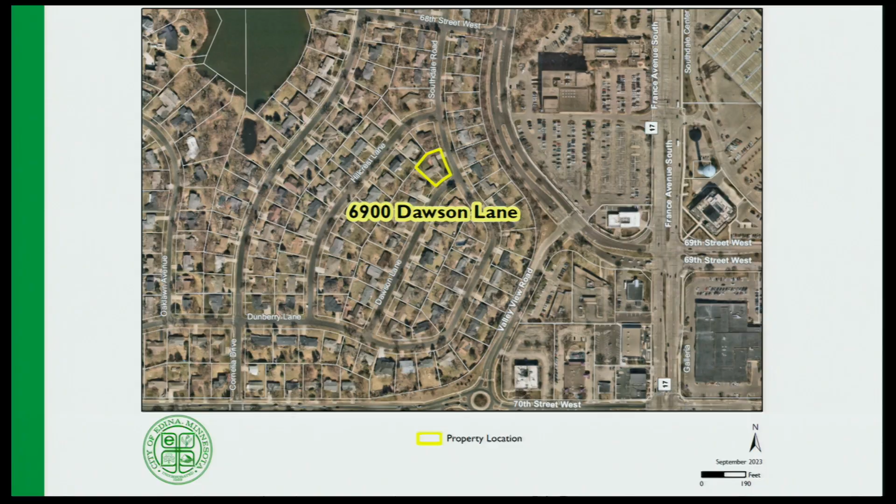And with that, Planner Teague, take it away. Thank you, Chair, members of the Commission. I'm filling in for Addison this evening, the author of the report. This is a variance request for a single-family home located on Dawson Lane. It's located west of the Southdale District, at the intersection of Dawson Lane and Southdale Road.

What the applicant is proposing to do is, currently they have a 2-stall garage with their home, and they'd like to get a 3rd stall garage. So it would be removal and build of a new 3-car garage located right here.

The way Edina's ordinances are set up, for a corner lot, when a house is built, it's up to the property owner to determine what their front yard setback is. When this house was built, it was determined that Dawson Lane would be the front yard setback and Southdale Road would be the side street setback. With the side street setback, you can go up to within 15 feet of the lot line, and with the front on Dawson, the front yard setback would be 35 feet. So that was how the home was located.

So the rear yard setback opposite of the front became this area here, and a 25-foot setback is required. Had they selected Southdale Road as the front yard setback, the rear would have been this side lot line, where a 25-foot setback would be required, and this would be the side. That determination was made back in the 50s when the home was built.

A couple of renderings of what the garage will look like from the street and the back. Looking at the variance criteria, the 3 criteria: first, the variance would be in harmony with the general purpose and intent of the ordinance. The intent is to prevent overcrowding of buildings, provide adequate space separation between buildings, and have a general consistency of setbacks within single-family homes.

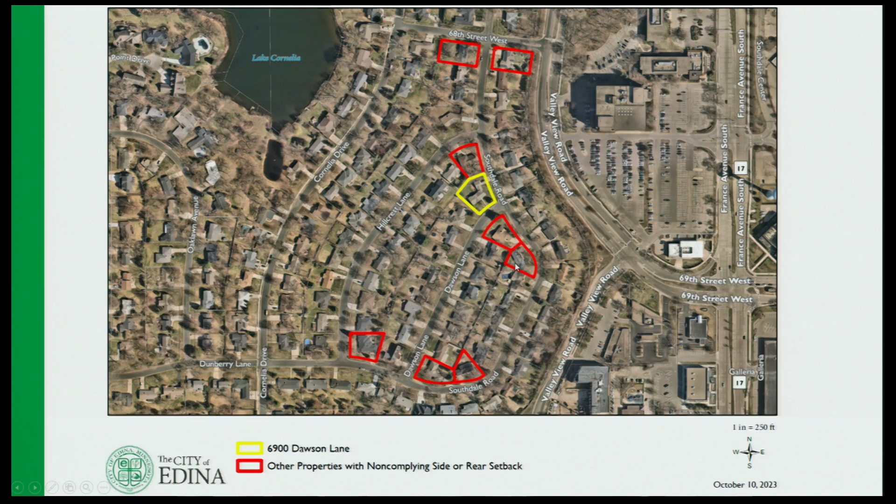The site is unique in that it's a corner lot. We have many corner lots in this area, and a lot of them are non-conforming. The properties highlighted in red don't meet those setbacks, so they're existing non-conforming uses. In fact, the site we're looking at has a 22-foot setback when 25 feet was the requirement, so this house is actually non-conforming as well.

We don't believe it would impact the essential character of the neighborhood. It gives the appearance of a side yard setback off of Southdale Road, and there is adequate separation between buildings. The applicant did provide a lot of support from their neighbors; those letters were included in your packet, and we didn't receive any comments on Better Together. So with that, staff is recommending approval, subject to the findings and conditions outlined in the staff report.

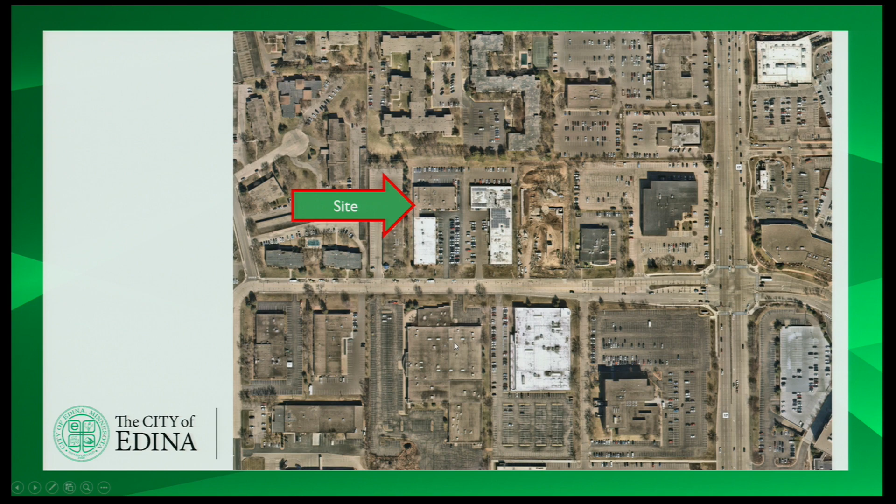Thank you, Chair, members of the Commission. This property is located in the Greater Southdale District, on 76th west of France. It's two properties we're looking at. To the east is a project called The Sound, an all-affordable housing project. Across the street is the future site of a new fire station that we went through recently. The site is guided office residential in our comprehensive plan.

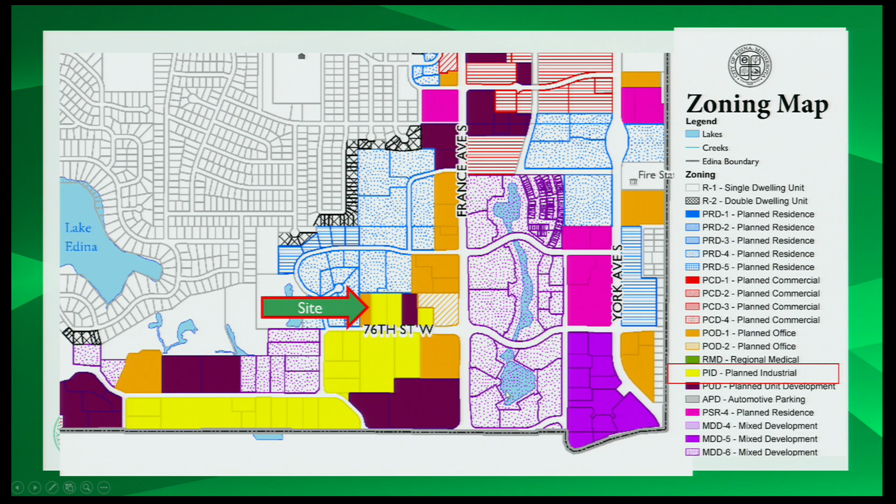Here is a rendering, just a block diagram. You can see the Sound project to the east, and you can see the 4-story and 6-story building.

So what this would require would be a rezoning to PUD. We could extend that existing PUD to the east to cover this site as well. This PUD has been the tool we've used for 100% affordable housing developments, examples being the Sound right next door, the Amundsen Apartments in the 70th and Cahill area, and the 4040 project.

On 70th Street. So just to quickly show you a compliance table, you can see the requirements in the PUD to the east. Differences being with the proposal here: the setbacks are a little bit closer on the north lot line, from 80 feet to 40 feet. The side setbacks would differ.

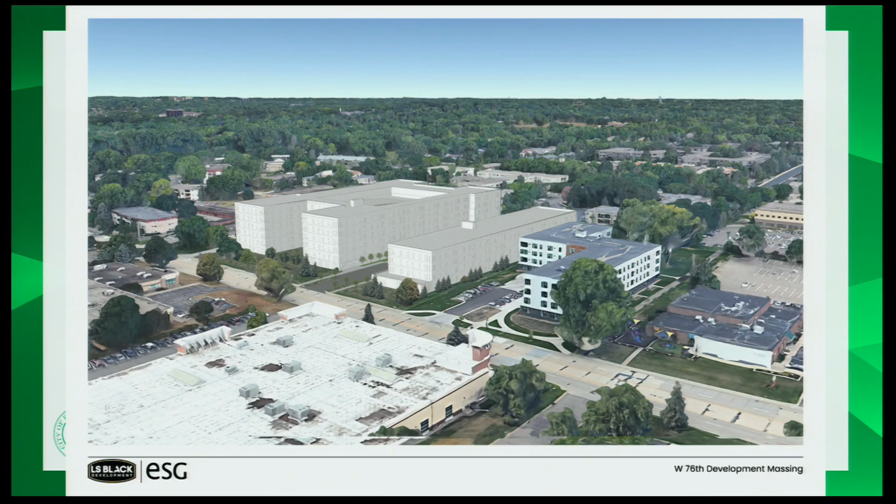Pedestrian connections. Given the large width of the drive aisles that were asked by the fire department, possibly these could be reduced in size, maybe some different textures, geogrid, something to that effect. Mic Johnson did provide a memo for your review. He suggested maybe even some of that space could be active playground, basketball court, something to that effect. So it could be used not just as a fire lane, but could be an active space for the residents of the building.

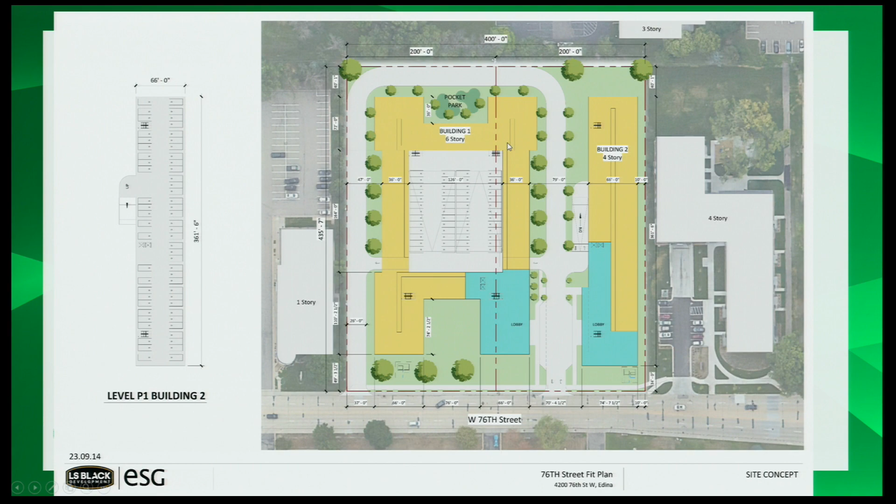They would be required to fill out our sustainability questionnaire. And we talked about the driveway widths being reduced. So I will stop there. Those are some of the issues to discuss. The applicant is here for a presentation as well.

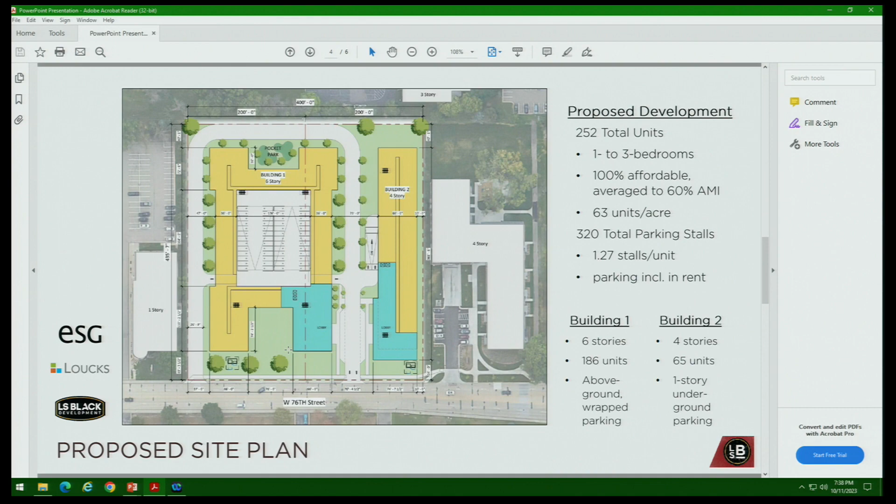We also have this smaller 4-story building here. The reason we separated that - originally what we had shown staff was a larger building, but we couldn't accommodate the drive around the building for fire, and thought that fire would also want 2 entrances or exits here. It seems that one of the recommendations was potentially eliminating one of those, which we could be open to, and we're looking for feedback on that.

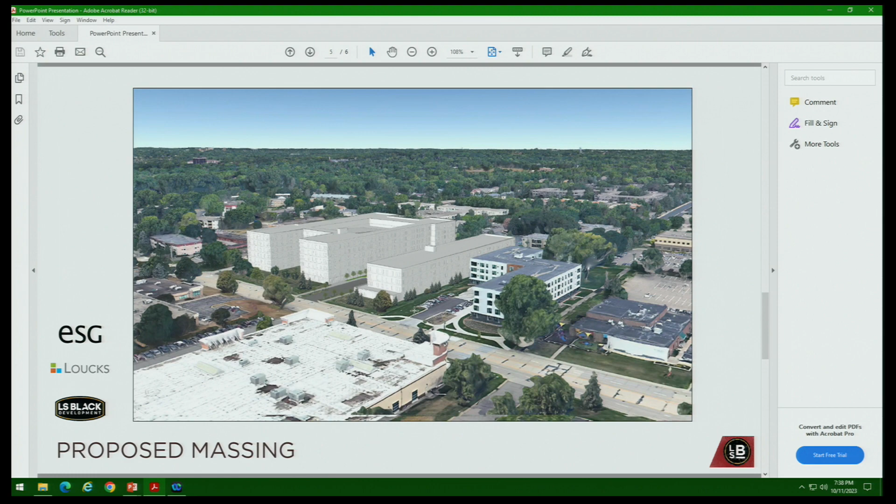Again, this is our proposed massing. They look a little plain at this stage - obviously we aren't showing our balconies here or the Class A materials that we'll have. As you can note in our other projects, we've done a lot of brick and stone and would want to do the same thing in this project.

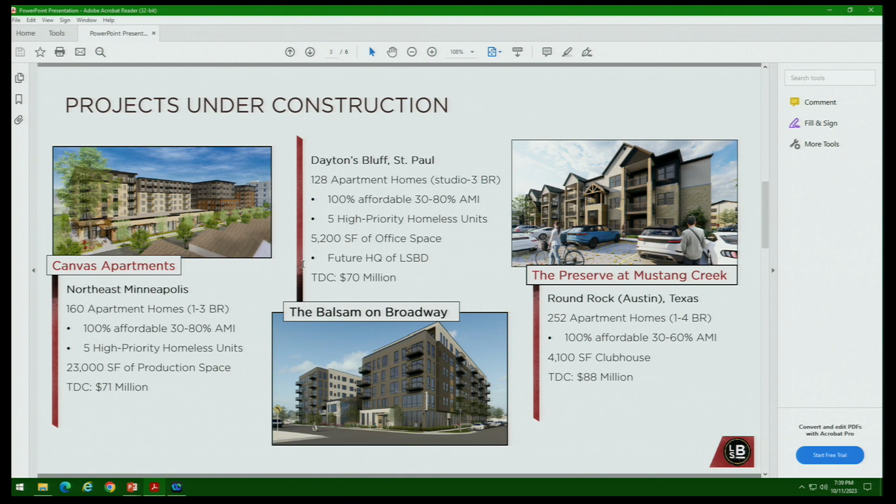One of our goals is for folks on the street to not be able to tell if it's a market rate project or an affordable project. That's very important to us. We're long-term owners - we'll own for 15 plus years, so high quality materials are very important. We do stainless steel appliances, granite countertops, and all the amenities that you would typically see in a market rate property.

Again, thank you for your time, and I'm here for questions and would really appreciate your feedback. Thank you very much, great presentation.

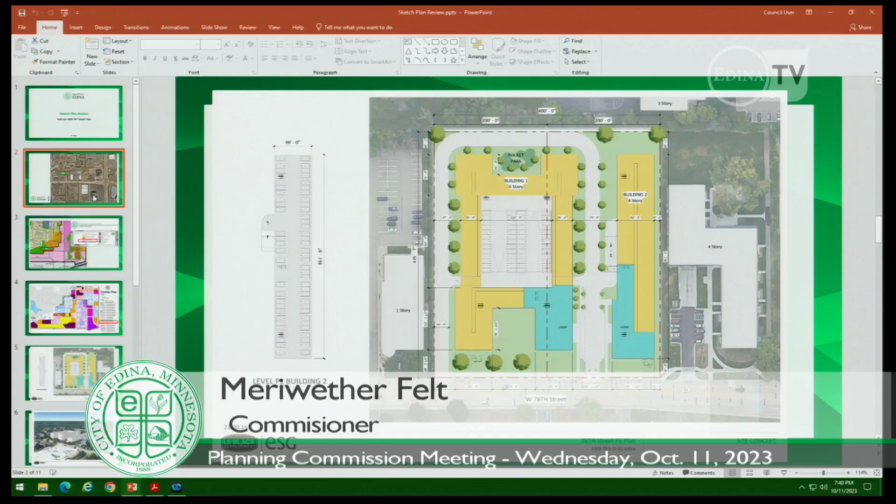So I noticed when you come off France, there's a couple of buildings there, and the Sound is one of them, where the setback of the existing buildings - the Sound, the credit union - are all pretty consistent. And wanted to ask, because your building kind of moves a little closer to the street than that, so wanted to know a little bit about that and if that could be looked at. Sure, I think the larger building is consistent with the credit union, kind of lined up with it here. But yes, this 4-story building does come out a little bit further, so that is something we could look at. In this project, we've just been really focused on maximizing density in order to make the numbers work.

As I'm sure you guys have seen or heard, housing projects in general are hard to make pencil right now, and affordable housing specifically with our capped rents, very difficult, especially in a great market like Edina, where land prices are high. Unfortunately, sellers don't give us a discount for our mission-based cause here. So that's one of our constraints, but that's certainly something we can look at.

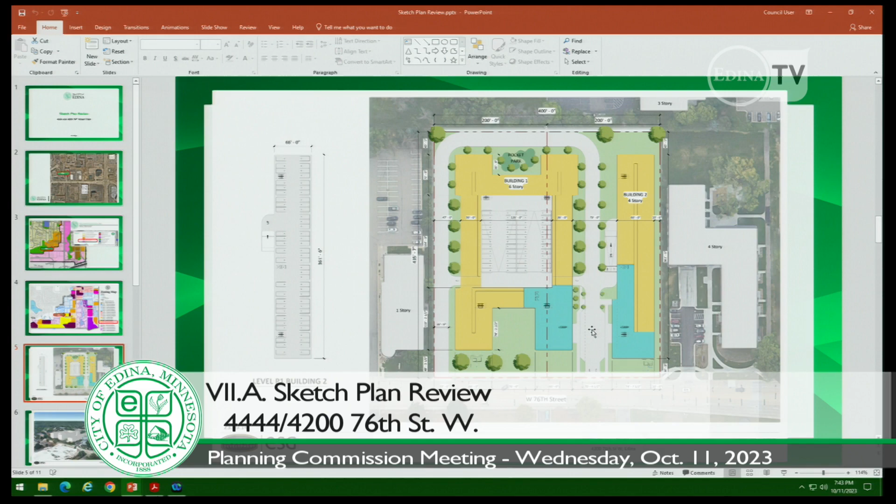Yes, absolutely. So the pocket park and the space in the front - our landscape design is not very far along at this point, so we would have to move that design forward. Another thing I should note, all of our projects built so far have an indoor play area as well as one of our amenities.

We'll have the majority of the units as 2 and 3 bedroom, so family oriented. It's kind of like a McDonald's Playhouse kind of structure, for our cold Minnesota winters. So there'll be multiple options, but certainly we will emphasize outdoor green space to the extent that we can. It would be lovely if it kind of blended in with some of those condominiums and apartment complexes - obviously they have mature trees, those are some of those things that take time.

Another question is this parking ramp - are these level parking? Yes, it's like a podium. And is that all 6 stories? Yes.

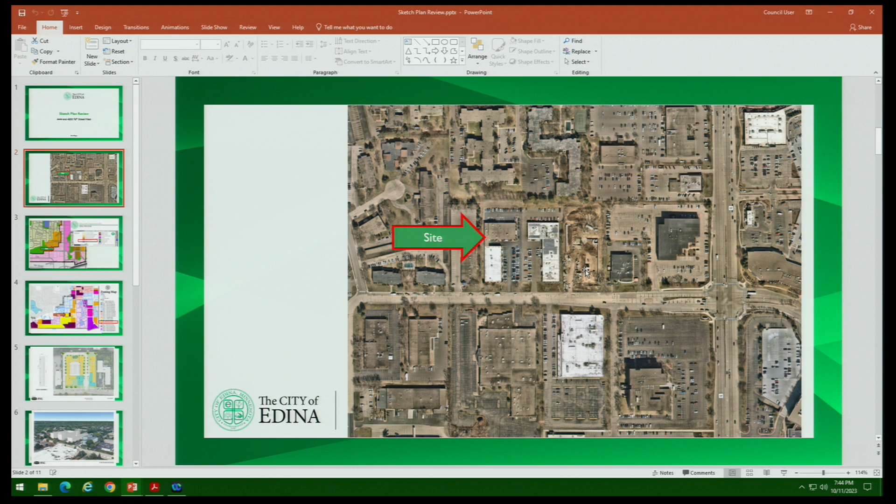If you go back to that site plan, number 2 - if you look closely, I was looking on Google Maps today, it looks like there's a walk on the north side of whatever's in the medical building in the corner that comes around and comes actually by the pond. All I have is a little piece of paper from Google Maps, and you can see a little sidewalk behind there that comes around. It'd be lovely if that could kind of go through, because once again there's some green space with those apartments on the north side.

Yes, and definitely in our site plan it's not fully developed how we will have sidewalks around the whole building as well, and on the front here. But yes, we could look at that as well. I think that's it for me.

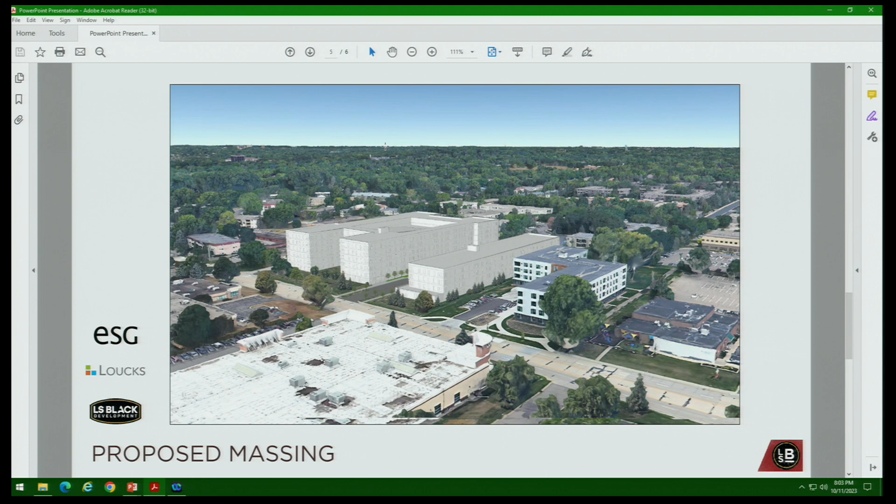Certainly landscaping, and then being creative with the materials we're using. Obviously we wouldn't do a long stretch of one material - that really accents the length. ESG has been great to work with, and I know they've done a lot of work in the city of Edina, so we'd look to them to guide us on the best way to break that up architecturally from a material standpoint, certainly.

Okay, that's all I got for questions. Yeah, Commissioner Padilla.

Just one other question. Are you operating under the assumption that being across the street from a large firehouse will add appeal for renters, or is that a detriment? I don't think it's a detriment. There could be some appeal there. It'll be great to see that redeveloped, and obviously the city has great plans for it. So we're looking forward to seeing that happen. But I don't think it's a detriment. Okay, but you're aware of it.

Correct. But it has nothing to do with your economic model in terms of how you derive rents or anything like that. No.

Any other question? Yeah, Commissioner Miranda. Yeah, thank you. So you mentioned that your building in St. Paul, you have some office space or will have office space for your business there. Is there any thought to having office or retail or restaurant in this building or either of these buildings?

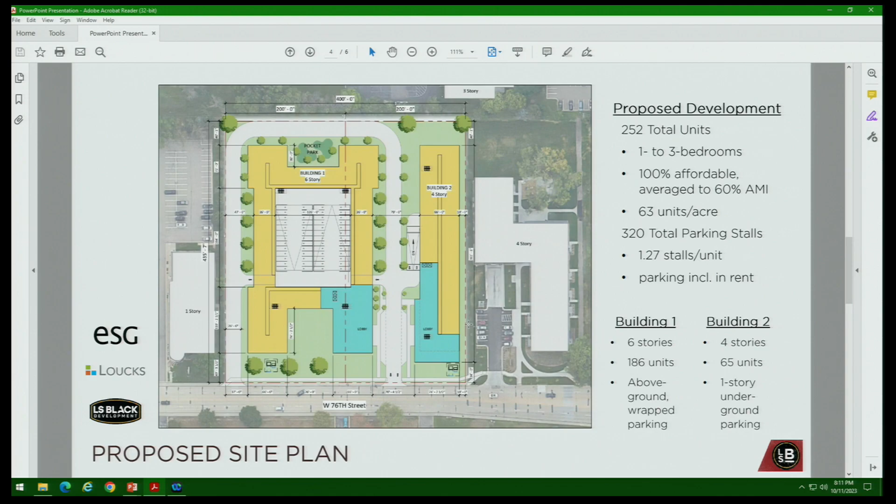If you've got a lot of people living here on a denser site, the more they can have little pockets of space to use around the site would probably be something people would appreciate, especially because there's kind of some less accessible uses in this area still. So ways to soften up the living experience, but generally supportive.

It would be good to see another iteration come back with some more of those details fleshed out. But thank you. Yep.

It's still very early in the design stage, so it's hard to really pick apart or be too critical of what's been presented today, because I know there's a lot of work to be done so far, right?

So as far as landscaping, you guys are still trying to figure out how are you going to use that notch, how are some of these parks going to be situated and everything. So I don't need to nitpick too much on the details in front of me, because I'm sure the next time you come in front of us, this will look exceedingly different.

I would recommend, though, that you carefully study the PUD purpose and intent section of our code. That's Chapter 36, Article 4, Section 36-253.

So the development that we just had approved, rezoning from PID to PUD right across the street—I remember early on in their development process, basically they had more or less a box that we didn't care for as much. And I made the same recommendation at the time and said, look through these 9 points of what we're aiming to achieve from a PUD, as kind of a give to get, and this is what we're asking for in return for rezoning to this type.

Think about all the ways that you can meet those requirements, right? And that really just goes to what other people are going to comment around—the efficiency of the streets, the quality of the design, the utilization of the green space, et cetera. So definitely make sure you touch on those points, and even a list of how you meet those requirements when you next come forward with a sketch is always very helpful.